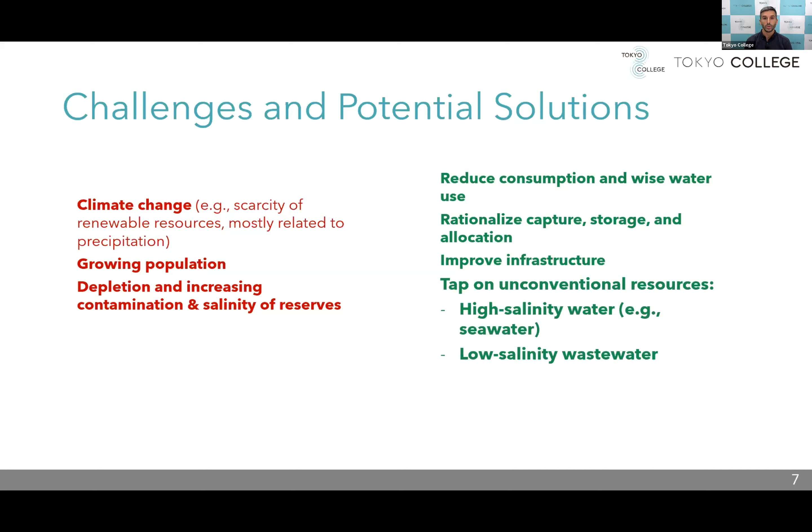What we can also do is tap on unconventional resources, for example salty resources such as seawater, and wastewater - the wastewater we produce every day when we cook and clean ourselves in our house. These resources have some salt in them, and we need to remove the salt, desalinate them, to be able to use them for all our needs.

When I speak about desalination to people who are not in the field, sometimes they're surprised that desalination is already ongoing today, and some places in the world already supply fresh water using desalinated seawater. The capacity of desalination - the cubic meters of fresh water supplied through desalination in the world - has increased exponentially in the last 30 years, and you see these figures in this graph.

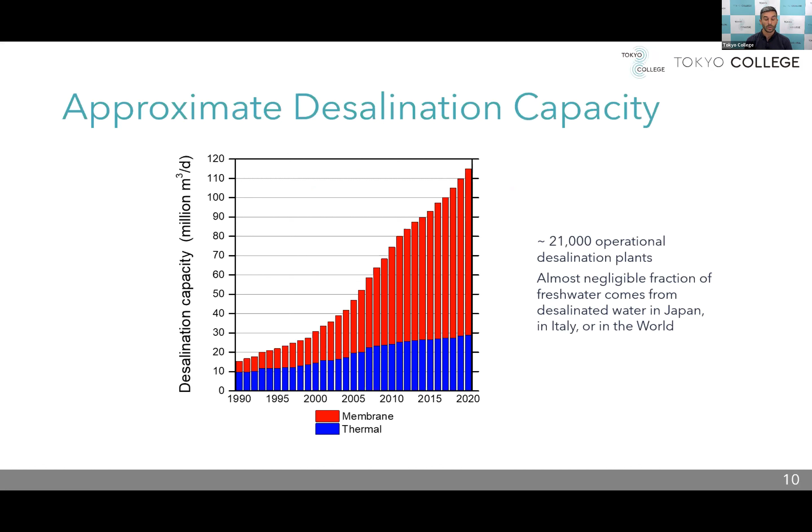We have today about 21,000 operational desalination plants in the world. These desalination plants, however, are mostly small scale. So as I mentioned in the beginning, a negligible fraction of fresh water that we supply to the population comes from desalinated water, especially in Japan and in Italy.

There are two technologies, two families of technology that we apply today to desalinate water, not just seawater but all salty water. These two families are distillation and membrane filtration. Distillation is based on a process we all know: we start with a mixture of water and salt, so salty water. We heat it up, so only water evaporates, salt remaining in the liquid. Then we can condense the freshwater vapor to produce liquid fresh water.

These technologies have extremely high energy demand. This energy is largely supplied by burning fossil fuels. Only large-scale plants make sense if based on this process, and these technologies are relatively high-tech.

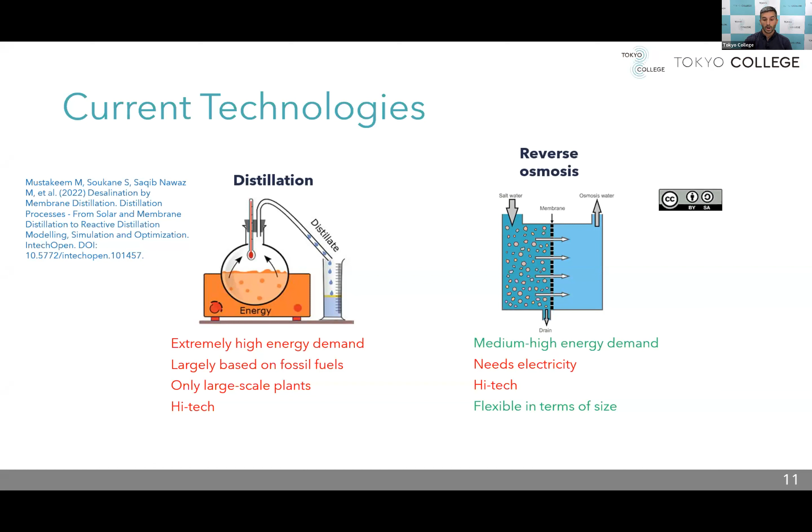Membrane filtration is called reverse osmosis in this case, and what we do is use a filter, a high-tech filter called a membrane, through which we squeeze the salty water. The membrane is able to let only fresh water pass and retains all the salt on the so-called feed side. So on the other side of this membrane, we can collect the high-quality fresh water. Reverse osmosis is a technology with medium to high energy demand. It needs electricity to function. It's high-tech, and it's a little bit more flexible in terms of size compared to distillation technologies.

These two families of technologies have some challenges. Because the energy is mostly supplied through burning fossil fuels or through nuclear energy, there are carbon emissions and environmental impacts of these desalination processes. We also have a problem with land use, because being industrial processes, if we decide to build a desalination plant, we take up space and cannot use this land for other beneficial purposes like ecosystem restoration or for the beneficial use of society. When we speak specifically about seawater desalination, we have potential problems related to intake of seawater from the sea and ocean, which may be dangerous for marine life.

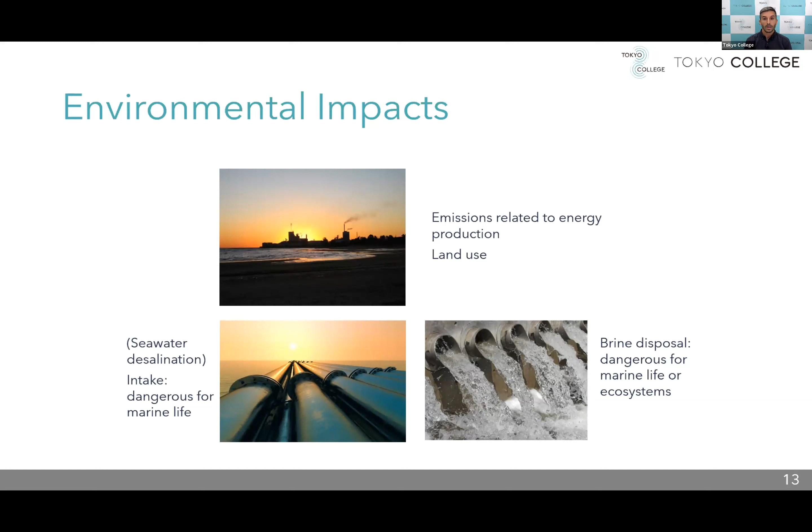When we talk about desalination in general, we have potential problems with so-called brine disposal, because the byproduct waste of desalination is a liquid of very high salinity that we need to manage and dispose of. Most of the time this is done by discharging this liquid back into the ocean, which may be potentially dangerous for marine life and ecosystems. To be honest, we do have the technologies already to make sure that intake and brine disposal are safe, but this also costs energy.

Energy is definitely the most important challenge for desalination. That's because desalination is a separation process. Every time we have an initial mixture of water and salt, and we want to separate it into fresh water, pure water, and salt, every time we separate something, this requires an effort.

We see that in everyday life. If we start with a mixture of candies of different colors, and I ask you to separate the yellow candies from the red candies, from the blue candies, it takes time, patience, and energy. It's very easy to mix the candies back into a mixture, but very hard to separate them by color. Also, when we paint with pigments, usually we start with primary pigments like cyan, yellow, and magenta. If I ask you to make green, you naturally mix cyan and yellow together. Now, starting from this green color, if I ask you to separate the pigments again to recreate the cyan and yellow, this can be done ideally, but you understand it's very difficult.

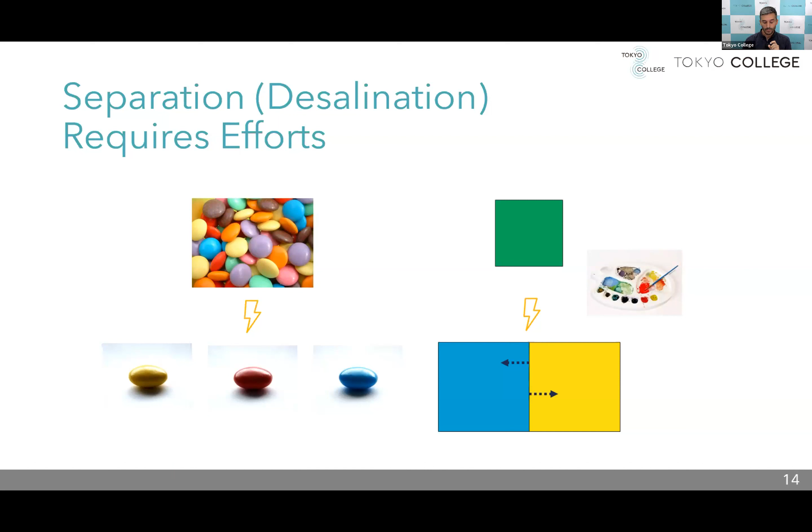So desalination, like these processes we see in everyday life, is energy intensive. The energy of desalination is represented in this graph, compared to the energy required to produce high quality water starting from conventional freshwater resources.

If you want to supply water starting from surface water like lakes and rivers, or groundwater, the energy demand is very small. It's the line that you see on the left-hand side of the graph, lower than 1 kilowatt-hour per cubic meter of product water.

When we want to produce high-quality fresh water starting from seawater, the energy is represented by the blue bar and the orange bar. The blue bar is associated with reverse osmosis, and the orange bar is associated with distillation technologies. So we use about 10 to 100 times the energy required to produce fresh water starting from conventional resources.

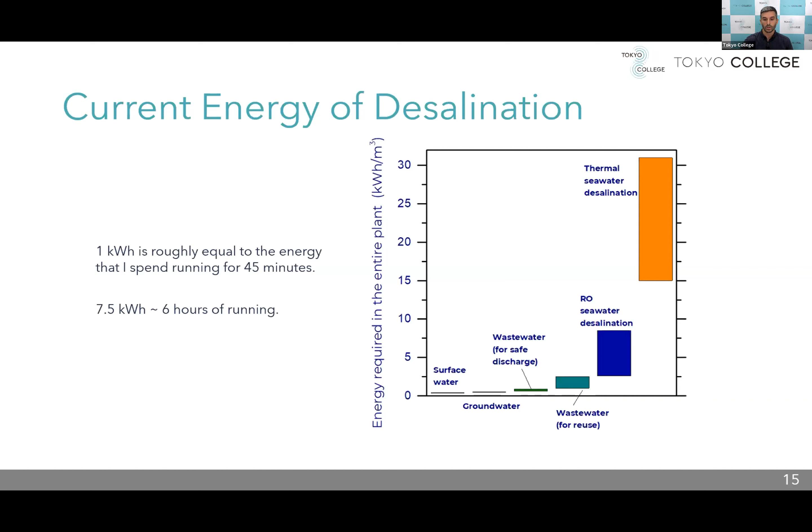Just to give you an idea, 1 kilowatt-hour is roughly equal to the energy that I personally spend running for about 45 minutes. In reverse osmosis seawater desalination, we need about 5 kilowatt-hours per cubic meter of product water. Because we need about 1.5 cubic meters per person per day to produce the water I need to function well every day, I would have to run for about 6 hours, associated with an energy of about 7.5 kilowatt-hours. So you understand this is a lot of energy that we need to supply fresh water to make society function and for the well-being of the people.

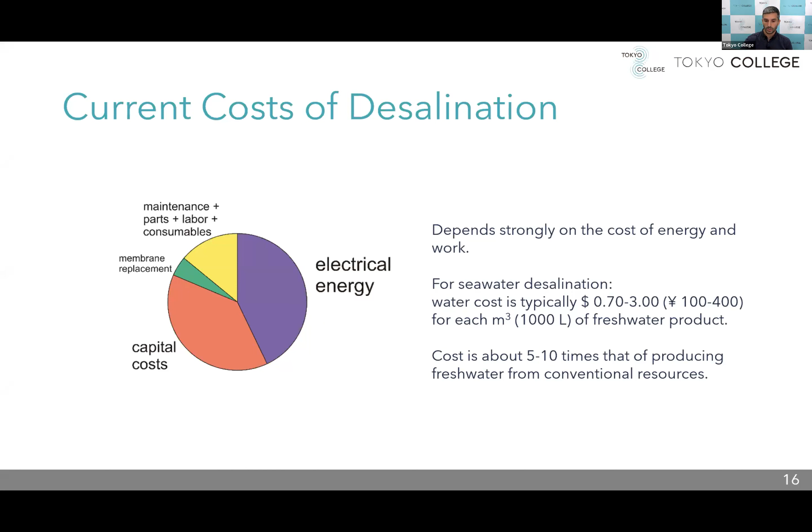So the cost of desalination depends strongly on the cost of energy. For seawater desalination, water cost is typically between 0.7 to $3 per cubic meter of freshwater product, equivalent to between 100 and 400 yen. This cost is about 5 to 10 times that of producing high quality freshwater starting from conventional freshwater sources. The cost of desalination also depends strongly on system size.

The larger the system size, the lower the cost, because larger systems are more efficient in terms of energy. Also, the cost of desalination increases dramatically, very rapidly, with the extent of salinity of the initial feed we want to treat. Seawater is a medium salinity feed, and the energy demand is medium to high, but there are other sources less salty than seawater that we should also consider. One of them is wastewater, a low salinity resource that's very abundant, which we can treat with a final step of desalination to produce water of sufficiently high quality for beneficial purposes.

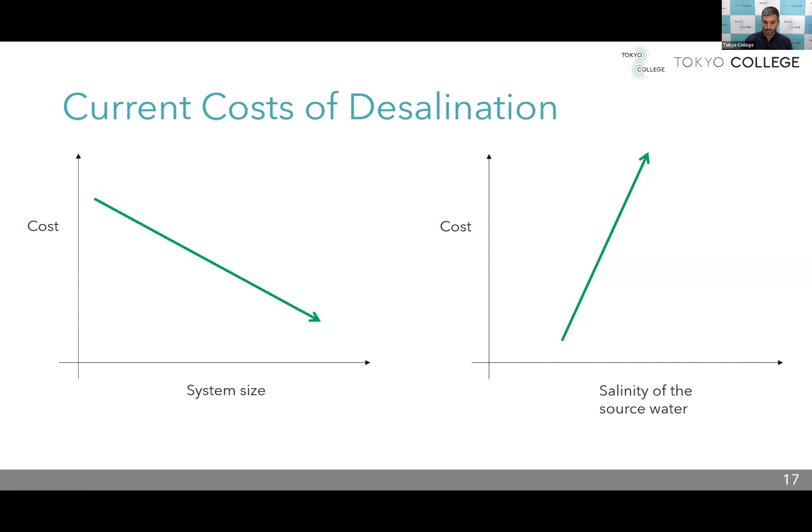These are some examples of desalination as it is applied today and the different costs associated with different implementations. In California and Arizona, they take wastewater, a low salinity resource, and desalinate it.

What do they do with the product water? They create pools in the middle of the desert where water can percolate into the aquifer, replenishing the depleted aquifer for use as a new freshwater resource. This costs not a lot because desalination of wastewater is relatively cheap.

In Singapore, they also take wastewater and desalinate it. Then they take the product water and mix it with conventional sources like groundwater and river water. This mixture undergoes further treatment for indirect potable purposes, producing drinking water that is bottled and sold in supermarkets. This is called NEWater, and it costs a bit more because the quality needs to be higher to be drinking water.

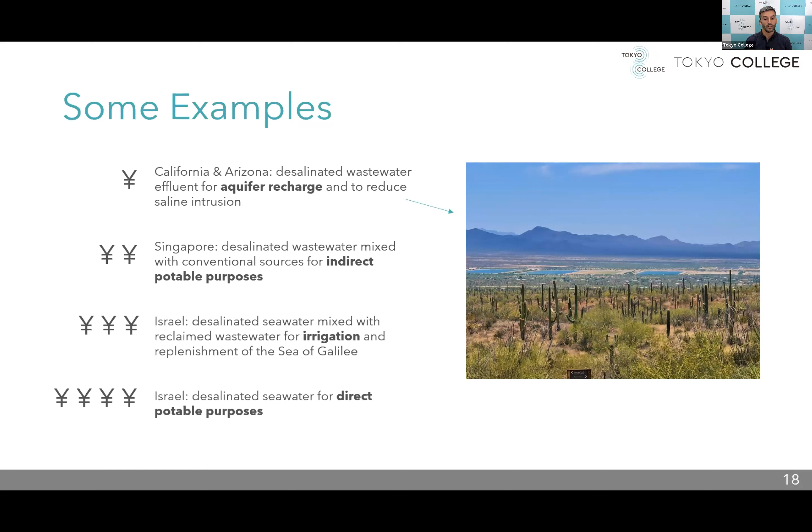In Israel, they desalinate seawater and mix it with treated wastewater for irrigation purposes. This costs more because seawater is a higher salinity source, so removing salt takes more energy and cost than from wastewater. Even more costly is desalinating seawater for direct potable purposes, since the final product needs very high quality. This is also done in Israel.

I've told you about some challenges we face implementing desalination technologies. Now I want to speak about opportunities and how we can implement desalination, in my opinion. This graph is a bit difficult to interpret, but I'll go through it quickly.

The main idea is that current desalination technologies, shown in red, need high exergy, or non-sustainable energy, to function. This energy comes in the form of high temperature streams, mechanical energy, or electricity. Current desalination technologies require unsustainable energy to function.

However, myself, colleagues, and other groups worldwide are researching and developing future desalination technologies that will function on low exergy, or sustainable energy, mostly in the form of low temperature streams.

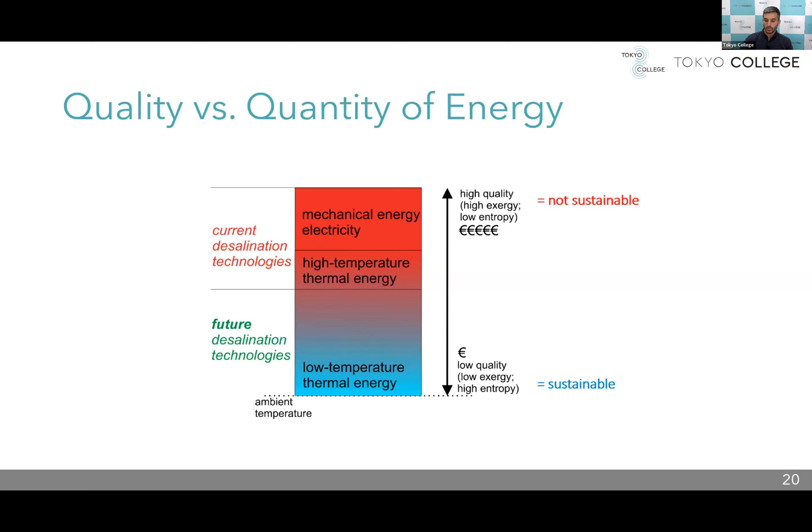What are these low temperature streams we can use? These are renewable, sustainable energy streams. First, of course, solar energy—we can tap the sun to drive these future emerging desalination technologies.

But we can also tap geothermal heat—the heat buried underground in liquid or vapor form.

Another very interesting energy source is so-called waste heat. Many industries, as a byproduct of manufacturing, produce a stream, liquid or vapor, of medium to high temperature, usually between 60 and 120 degrees Celsius. Since they can no longer use this stream for manufacturing, they discharge it into the environment—one example is cooling towers, as shown in the picture. This doesn't make much sense, since we should be able to tap this stream because it contains a lot of energy at medium to high temperature.

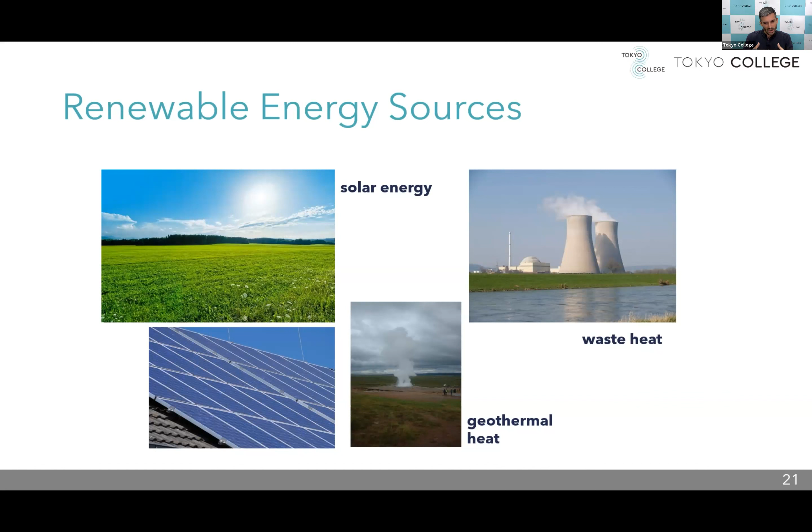Unfortunately, we cannot use this stream to run current desalination technologies, but we will be able to use it for future ones. This waste heat stream is free, so instead of releasing it into the environment, we can use it for free with heat exchangers, extracting the heat for desalination purposes.

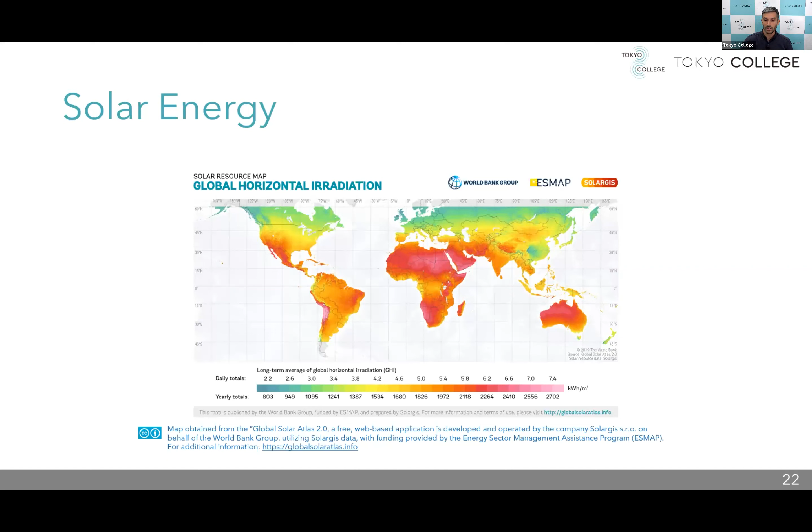Today I don't have time to go through all the desalination technologies we are developing, but I'd like to mention some names. One is called membrane distillation, which is exactly what the name suggests—a hybrid of distillation technology with membrane-based technology.

So the two families that I talked about in the beginning of this presentation, if these two processes are hybridized in a smart way, then we can sustainably desalinate water using membrane distillation. Another version of this technology is called osmotic membrane distillation. We don't need a membrane necessarily to separate water from salt. So other versions of evaporative technologies are called interfacial evaporation and solar stills.

In solar stills, of course, you use the sun to drive desalination. We can also use water sorbents. These are materials that can suck up fresh water from a mixture of water and salt, and then we can re-release fresh water from these sorbents to produce our high quality final freshwater product. And we can also harvest humidity from the atmosphere using a thermodynamic cycle that's driven by renewable energy.

Just to give you an example of the amount of work being done these days, on the right-hand side I put down some numbers of the number of publications from universities on the specific technology of membrane distillation in the last 20 years. You see that the amount of research is increasing very, very rapidly.

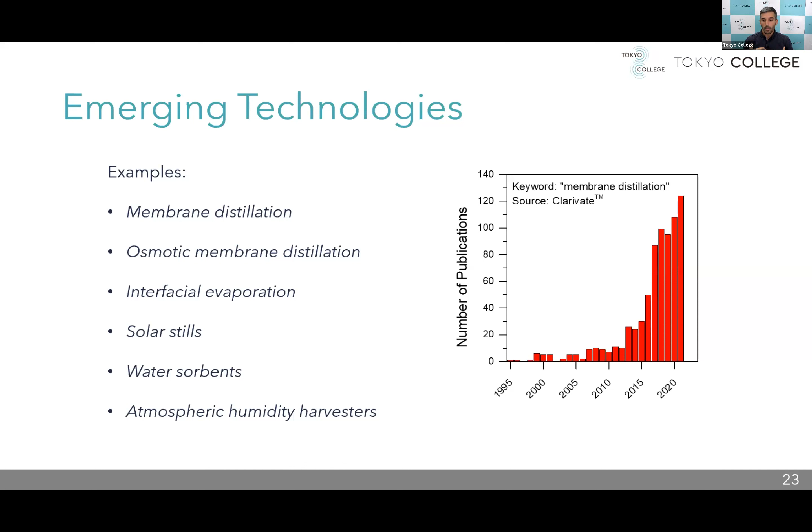I also want to mention one possible version of some of these technologies, one possible design that we call passive design. This cannot be done with current desalination technologies, but it can be done with some of the technologies I just mentioned, designed and implemented in a passive version. So what is passive? I'm going to read the definition on the slide.

A passive technology is a small, standalone, and self-operating system characterized by inexpensive and widely available materials and parts, and by easily maintainable components where all processes occur without mechanical moving parts. So it's a version of a technology that's not high-tech, it's low-tech, and it's self-operating. It operates by itself, and if it breaks down somehow, it's very easy to fix with very cheap materials.

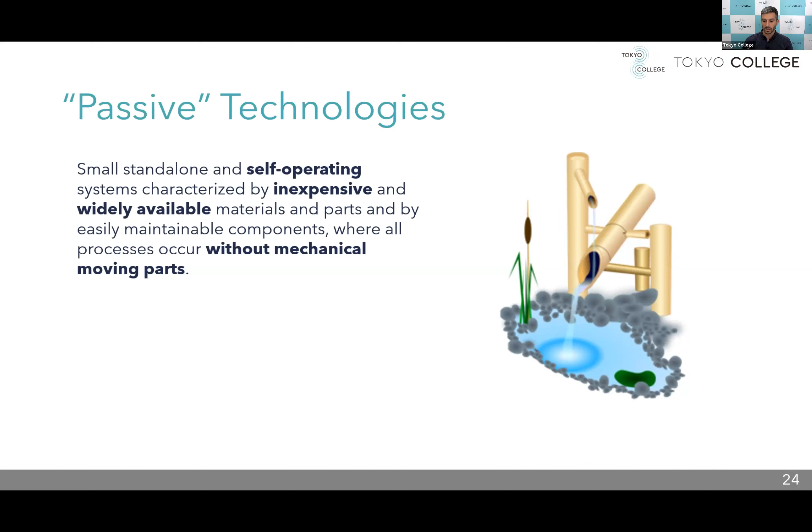One passive technology that Japanese people are very familiar with is shishi-odoshi. Actually, this is not to make water - it's to keep animals away from farms by making a tapping sound, and it uses water to run. But as you understand, it's a very smart, easy technology made of cheap materials that operates by itself. This is just an example of what we can do with future emerging technologies, designing them in a way that's very intuitive, cheap, and easy to maintain.

I just want to make one disclaimer before proceeding, which is that these future technologies will likely only be implemented at small to medium scale. And if you remember what I said earlier, the cost of desalination increases if we make these technologies at small scale - it seems a contradiction, as if future technology would be more costly. However, because the cost of desalination is related to the type of energy we need, and that energy is sustainable, the actual cost will be low, especially as renewable energy becomes cheaper and cheaper.

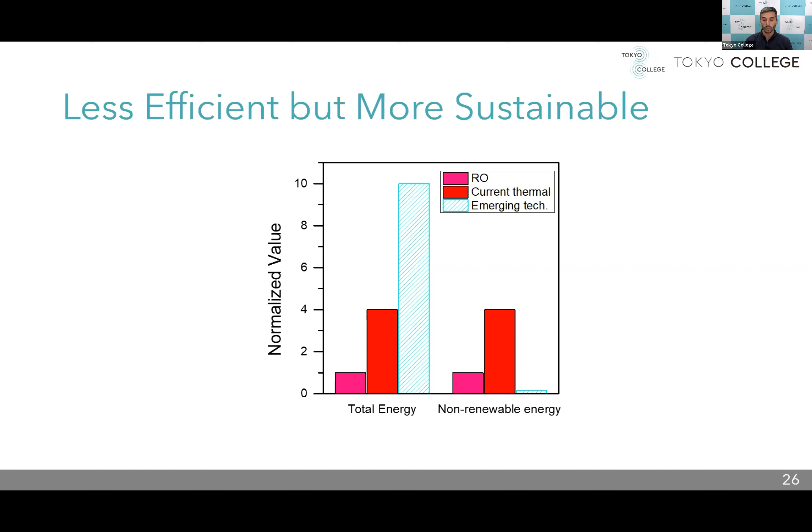However, the non-renewable fraction of this energy is much larger in current technology compared to these future technologies for desalination. All the energy we need in current technology is non-renewable, but most of the energy we will need in these future technologies will be renewable. So the costs will drop - the cost of desalination using these future technologies.

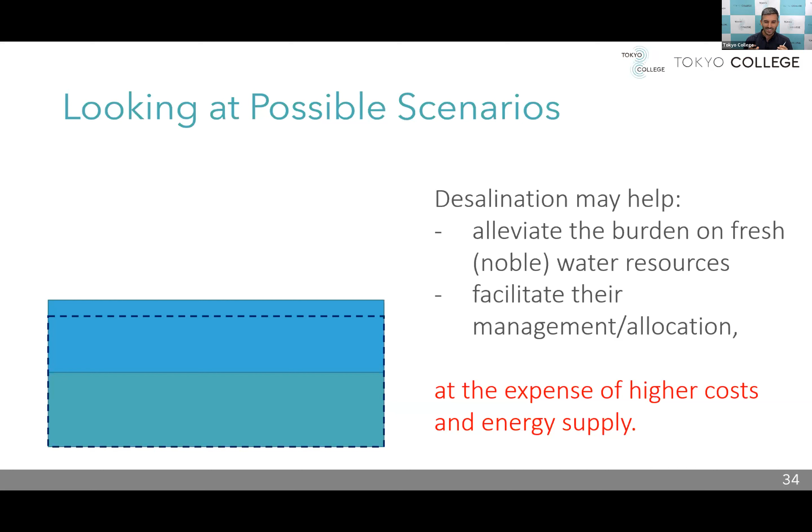Just to close, another example of how we can implement desalination in a rational way. In this slide, what we have is a square that again represents the total amount of water that needs to be supplied in a certain location or nation to support societal well-being.

In this location or nation, we have many diverse water needs, so not all water is needed for the same purpose. Some water is needed for potable purposes, some for agricultural purposes, and even within agriculture and irrigation, water of different quality is needed for different crops. Also, some water is needed for toilet flushing, for industrial purposes. There are many different water needs, and each requires a certain quality of water.

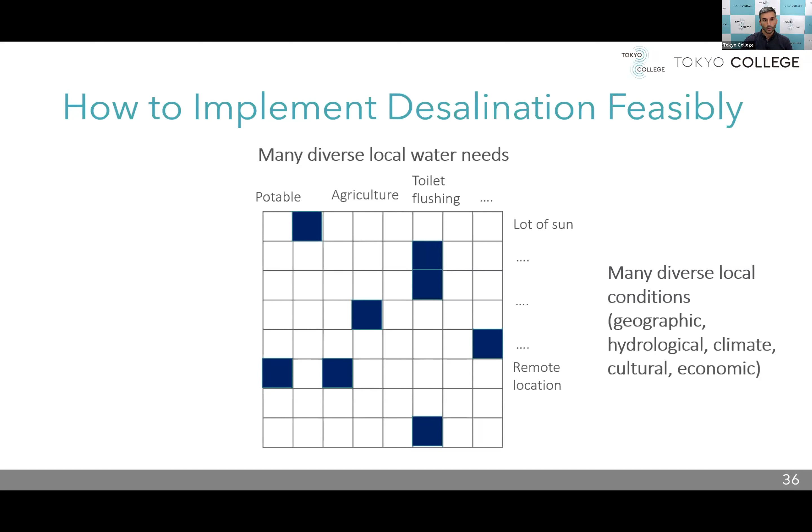But we can take it even a further step. With future desalination technologies, given their flexibility, we can also design them in different ways that make sense for each specific combination. So we don't just cover some of the water demand by desalination, but we also have different shades of desalination. For example, in some cases it may make sense to implement desalination like we're doing today, using large-scale centralized electricity-driven desalination. In other cases and combinations, it may make more sense to implement desalination at small scale using decentralized passive systems.

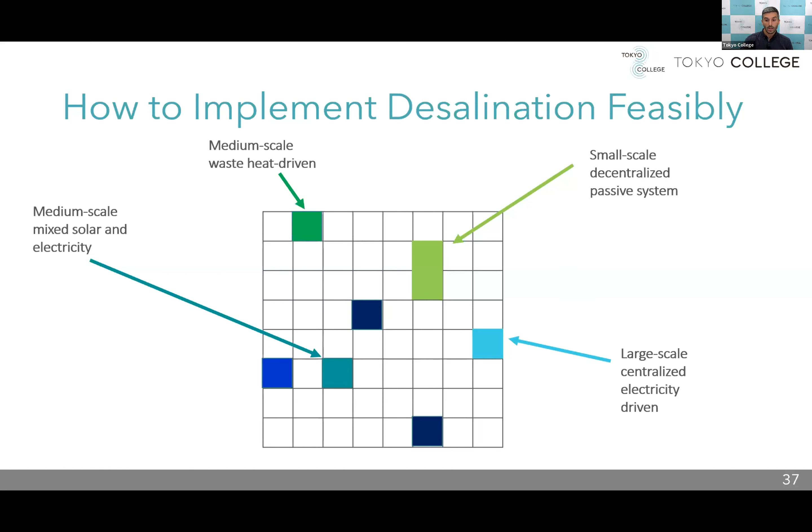In some cases, it might make sense to use waste heat because we have it available under certain conditions, and build medium-scale desalination. Or we can use medium-scale plants where we hybridize the energy supply using a mixture of electricity with solar thermal energy. This can be done because we are developing technologies that can be implemented in different ways.

So to summarize what we talked about today, obtaining high quality water from salty water, so desalination, is relatively expensive. And unfortunately, it will always be relatively expensive because the energy required for desalination is always going to be higher than the energy required to produce high quality water from freshwater resources. This is something we cannot escape in this universe, at least, because of some thermodynamics reason.

Emerging technologies of desalination that we are developing trade efficiency with sustainability. So they are actually a little bit less efficient than current technologies of desalination, but they're much more sustainable because we can tap on renewable energy to drive them.

We need to remember that every condition is unique, and there is no universal one-size-fits-all solution for water supply. So desalination is just one of the solutions that we need to implement within a portfolio of solutions to increase freshwater supply sustainably.

Luckily, emerging technologies that are being developed may be tailored for different purposes, and this flexibility will help a lot in implementing desalination rationally. Of course, a lot of research and technology transfer is still needed to get to that point. And as I mentioned, desalination is just a technological solution.

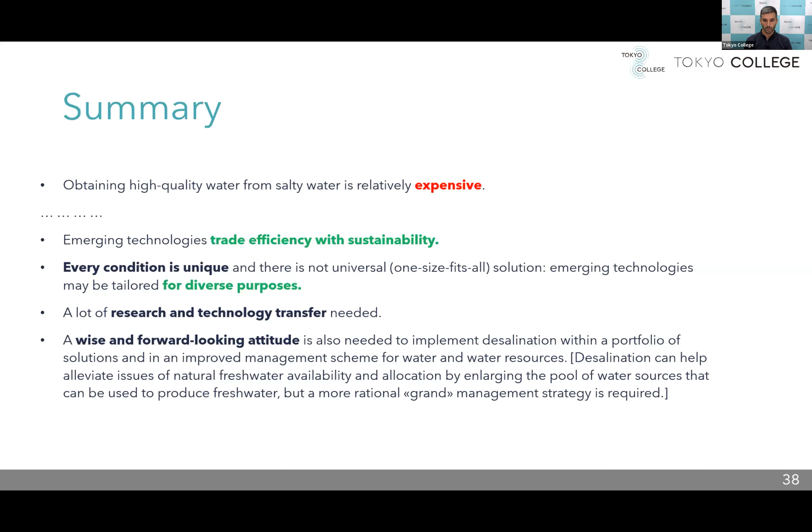Thank you very much for your attention, and I'm looking forward for the discussion.

Okay, thank you very much, Alberto. You covered quite diverse and comprehensive aspects of the current situation of water scarcity, as well as the coping technology. I really appreciate your input.

Now I would like to invite today's commentator, Dr. Kurisu Kiyo. She's associate professor at Department of Urban Engineering, the University of Tokyo. Kiyo takes socio-psychological approaches to environmental problems and focuses on factors affecting people's pro-environmental behavior. I would expect that Kiyo could pick up various aspects of desalination when it is combined with renewable energy. So now I think you are ready to respond to the lecture by Alberto, please.

Okay, thank you, Professor Mino. Thank you also to Alberto for the very valuable talk about desalination technology. I'd like to provide some comments for his talk.

Here I'd like to show an overall comment for his talk. Seawater or brackish water desalination can be said to be a technology of great hope for areas where water is scarce. However, as Alberto already mentioned, the problem is the large amount of energy consumed during operation. Most of the greenhouse gas emissions, such as CO2, associated with seawater desalination's life cycle come from energy consumption during the operation stage. I'd like to show one example in the Japanese case in the next slide. If this can be covered by renewable energy, it will become a very promising technology.

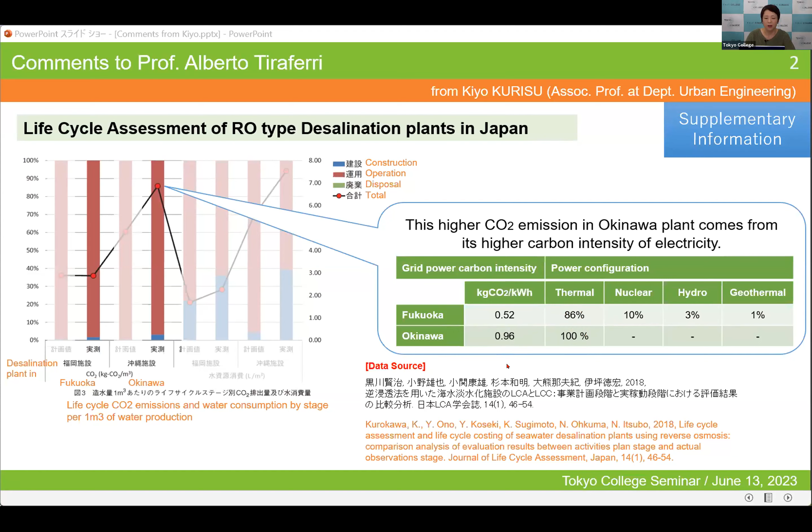The reason is that in Okinawa's case, the grid power energy, electricity, is mainly produced by thermal power generation. On the other hand, in the case of Fukuoka, other electricity sources like nuclear, hydro, and geothermal are used. So the CO2 emission is a little bit lower compared with Okinawa. As I've already said, if this energy consumption part is covered by renewable energy, the total greenhouse gas emissions are reduced and this technology becomes more sustainable.

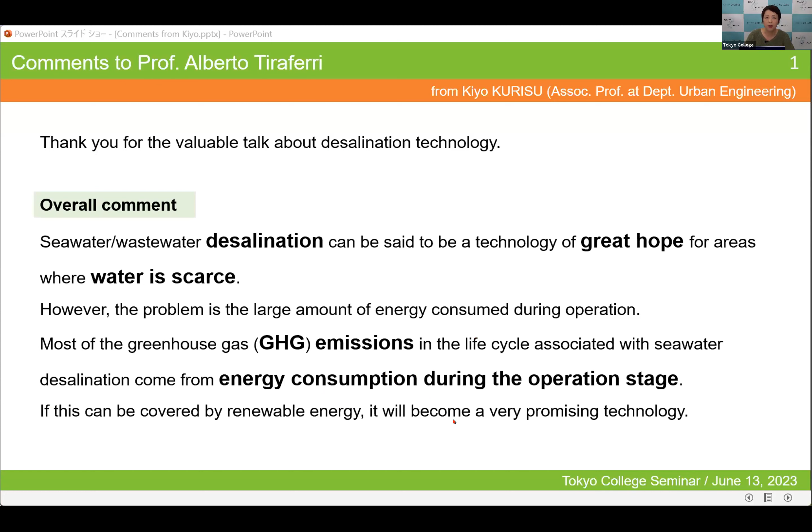One is possible limitations of passive technology. Some are already talked about by Alberto, that it is small and cheap and to some extent low tech. Maybe it would be small, but is there any possibility to scale it up? Can it get enough flow for covering the needs of the local people? How promising is it in future? It was already mentioned it will be cheap, but I'd like to know more - comparing with other technologies, how about cost?

Also, in the middle of his presentation, he mentioned the environmental impacts of effluent, such as brine, very high salinity water, and maybe higher temperature of effluent can also have some impact on marine ecosystems, I think. He already said there are some technologies for making these effluent problems safe, but if you can have some information, I'd like to know more about the current measures to reduce these impacts on marine ecosystems.

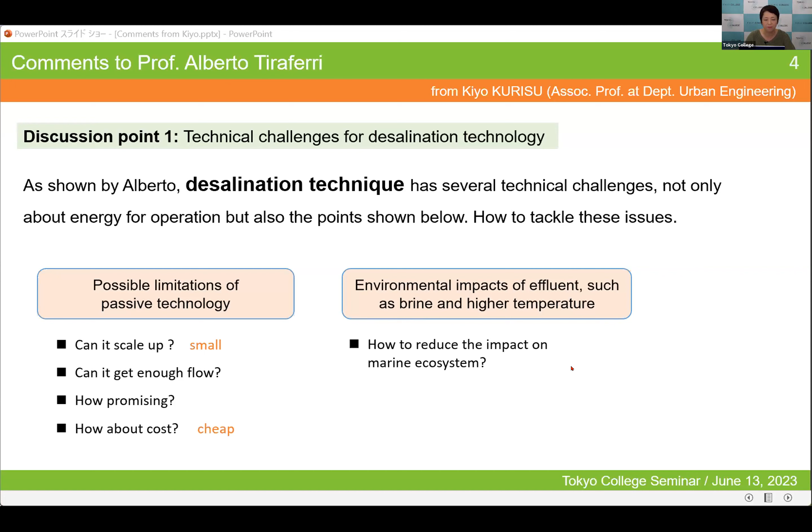Discussion point 2 is key factors for adoption of desalination technology. As pointed out by Alberto, desalination technique is not the best option for all regions. Some combination is needed. So what are the key factors that determine the adoption of desalination technology? I divided these factors into two parts. One would be geographical conditions, such as climate, other water source potentials, and also seawater availability.

Another would be socio-economic conditions - the economic power for construction and operating desalination. I think the investment cost of desalination is also high, expensive. So I think the local government needs some economic power to invest in this technology. Also the water tariff settings and users' ability to pay. And also I'd like to know human ability to maintain this sophisticated technology.

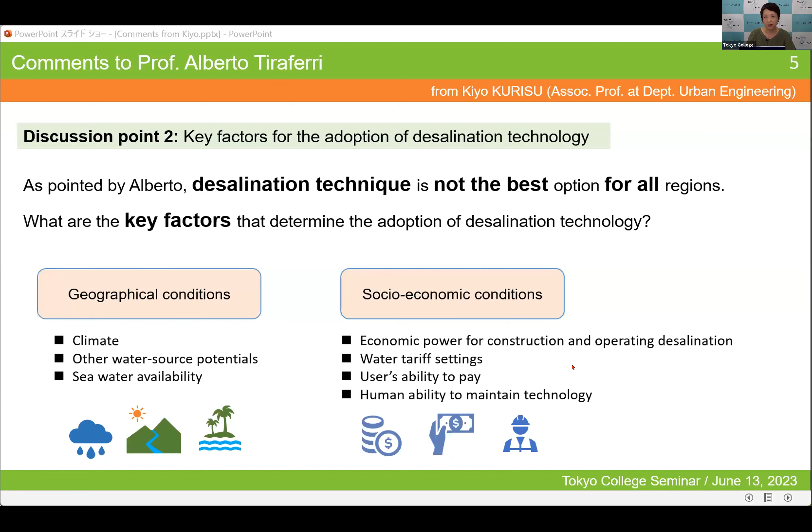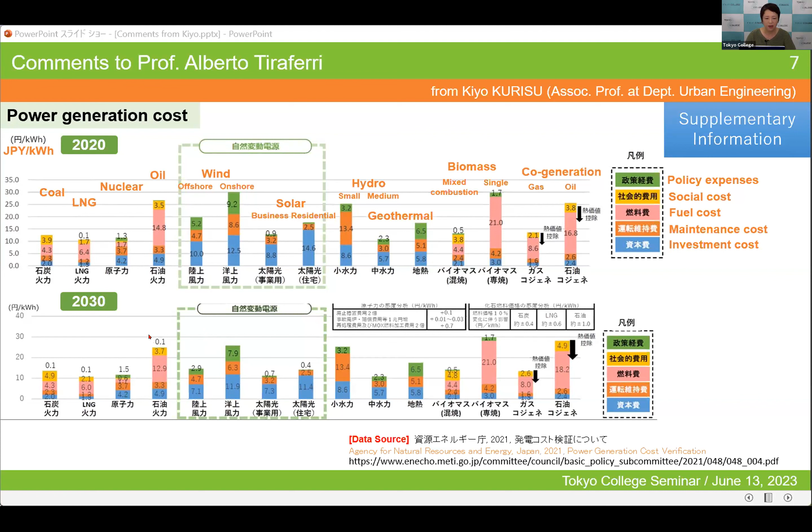I'd like to show one data set from the Agency for Natural Resources and Energy, Japan. They show the power generation cost, not price, but the cost. The upper graph shows the cost in Japanese yen per kilowatt hour of power generation. These are coal and LNG and oil. Comparing with these fossil fuels, wind power and solar power are not so much cheaper. In the case of wind, it's still quite more expensive, and this trend is continuing even in 2030. So I want to know about these cost issues.

Another point is stability of renewable energy. Major renewable energies such as solar and wind power are not stable and are influenced by weather conditions. So how much operational energy can actually be covered by renewable energy? In other words, is 100% coverage technically possible or not?

The final point is which renewable energy is more promising from the viewpoint of combination with desalination technology. Various options can exist, such as solar power, offshore and onshore wind power, biomass, and Alberto also mentioned geothermal, and nowadays hydrogen is quite a promising new energy source. So are there any restrictions or better recommendations for matching with the desalination technology? This is my final point.

So thank you, Alberto, again. This is a very interesting and valuable talk. Thank you.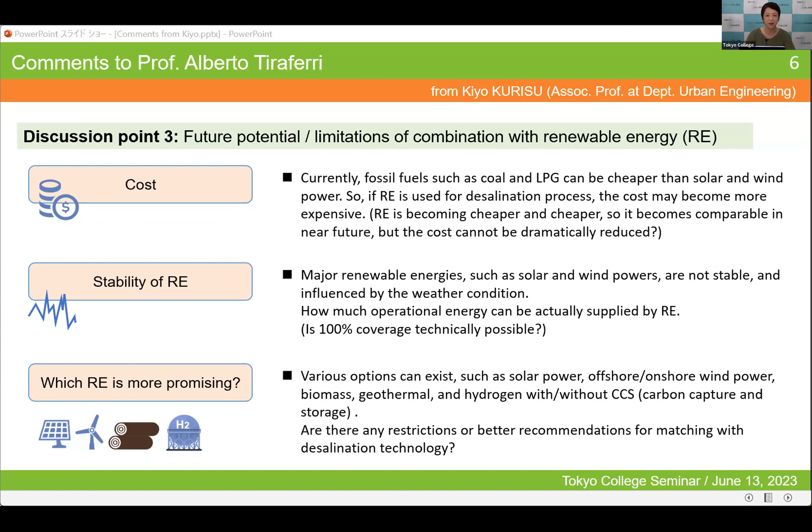Okay, thank you very much, Kiyo-san. Actually, the talk by Alberto was very comprehensive, but the comment by Kiyo is further comprehensive, and she touched upon various aspects of desalination. Especially, she picked up three technical challenges and the conditions for the usage of desalination and the future aspect of desalination. So I'm sure that Alberto, you would like to respond to Kiyo?

Yes, thanks very much for your raising all these very valid points. There were quite a few, so I'm going to try to go through them relatively efficiently and respond as much as possible. Starting from technological challenges, one of the points raised by Kiyo-san was the implementation of passive technologies. How can we scale them up, and where do they make sense?

We can scale passive technology up a little bit, but in my opinion, it doesn't make sense to scale them up too much. They make sense when they are small or relatively small, because only at small to medium scale can they really be easily maintainable, and they don't need skilled personnel to be operated. So the productivity of passive systems will be low, probably in the order of a few tens of liters per day. There is a threshold above which even this passive technology doesn't make much sense.